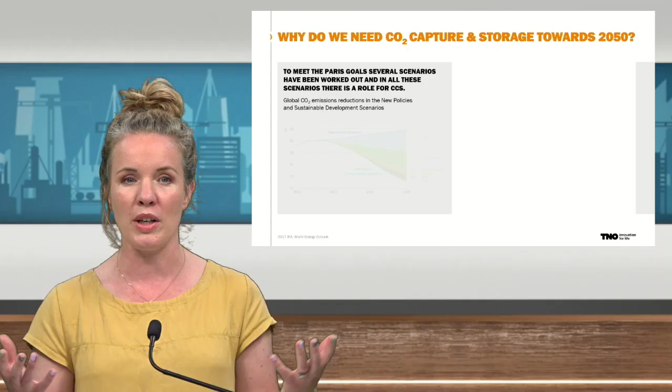So, please fill in your answers. We will come back to the results of the poll question a bit down the line. So, this is me asking you this question, but of course I want to say what we as TNO and the people here think. Why do we actually need CO2 capture and storage towards 2050?

For us, it's important to see where CO2 emissions are difficult to avoid. And we see that there's quite a lot of industries and sectors where it is actually hard to avoid CO2 emissions with other measures than CCS. So if you want to reduce the emissions there already now and in the coming decades, and not wait until technologies are so mature, we need CCS right now towards 2050.

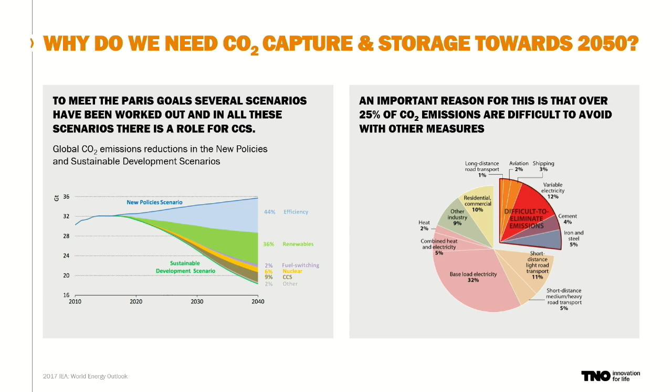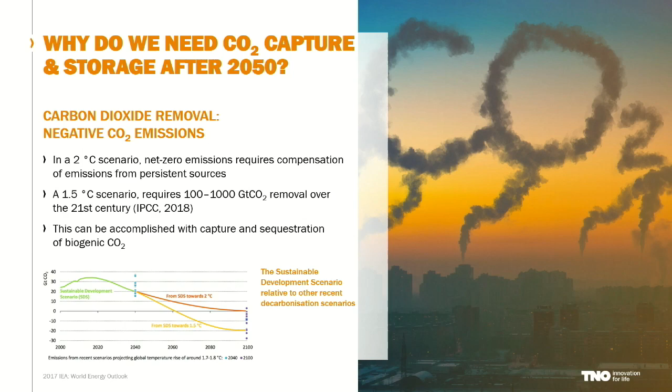But we think that even beyond 2050, CO2 capture and storage is necessary. This comes from the IPCC report, where it states that if we want to stay below 1.5 degrees of warming, we actually need negative CO2 emissions. And negative CO2 emissions you can only obtain when you do carbon capture and storage. So we actually think that it's very important.

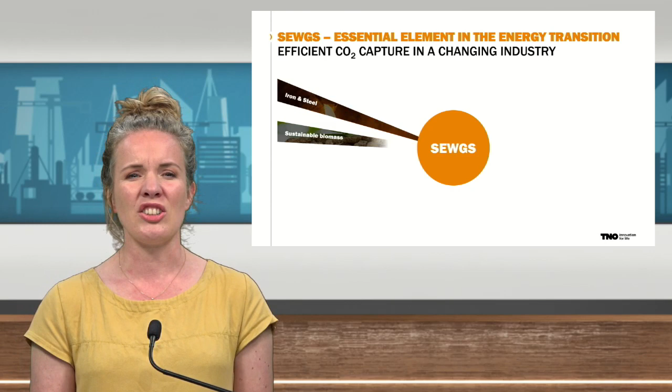And here comes in the SEWGS technology. So we think we have here a versatile and attractive CO2 capture technology, and I want to tell you a bit more about this. SEWGS is an essential element in our opinion in the energy transition, and what's nice about it is that it's really a platform technology. So today we will focus on the iron and steel industry because we're making some great steps there, but SEWGS can actually be used for many types of industry.

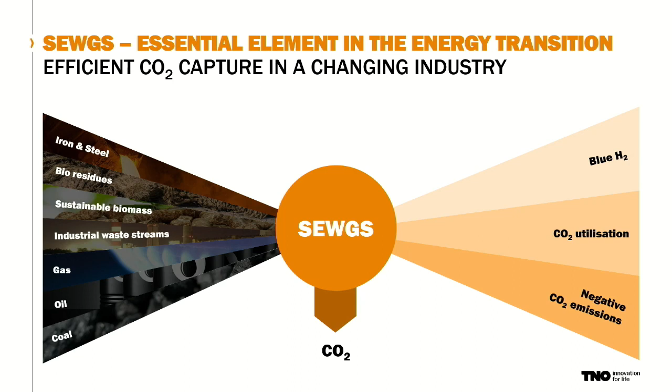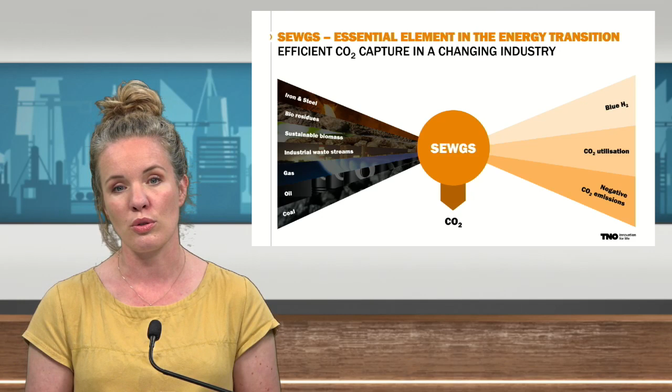Everywhere where you have syngas type mixtures, you can use SEWGS. So from the gas and oil sector, coal sector, everywhere where you have sustainable biomass sources. And with the SEWGS technology, we capture the CO2, but we also produce blue hydrogen. We can use the hydrogen and CO2 for CO2 utilization, and when you use biosources, we can go to negative CO2 emissions.

Well, how does the technology actually work? Because that's important. SEWGS stands for Sorption Enhanced Water Gas Shift. It is based on two things. First, the water gas shift reaction, where CO and steam react to CO2 and hydrogen. And secondly, it's the adsorption of CO2.

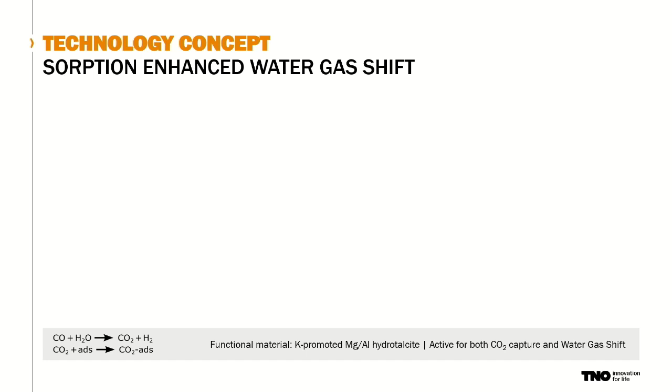Where the water gas shift reaction is an equilibrium reaction, by capturing the CO2, it is possible to completely shift the reaction to the production of hydrogen. And that works as follows. We have multiple columns, and they are in different stages of the process, which I will describe.

First, we have the adsorption stage. So we're at high pressure and high temperature, and we're coming in with a syngas mixture. It can be a mixture in different forms, but we're coming in. Here we have the water gas shift reaction, so your CO is converted into CO2 and hydrogen, and your CO2 is simultaneously adsorbed on the adsorbent that we use. This means that on the bottom of the reactor we have the hydrogen product.

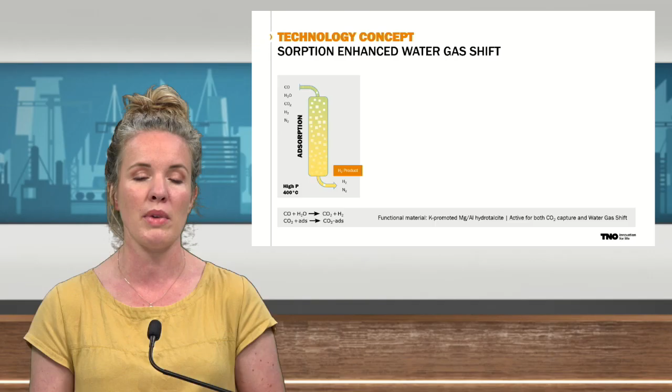At a certain point, the material we use is saturated, and we want to go to another column in adsorption mode. But the column that is saturated, we use the following steps. First, we have a rinse step where we rinse the column with steam. This is to get the optimal CO2 purity.

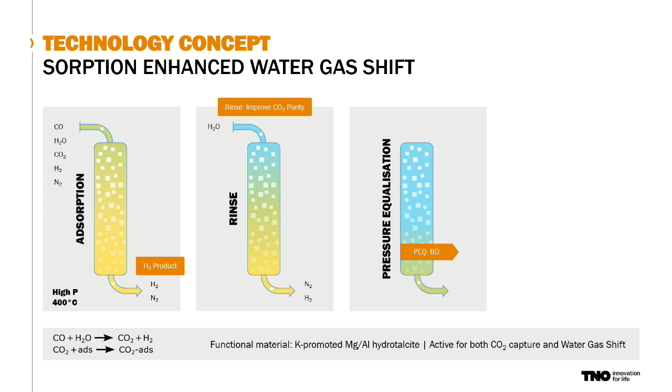Then we have a pressure equalization, which is very important for the efficiency of the technology, because by lowering the pressure, we can get another column that is at low pressure up to pressure. And this is also how the technology works. It's a pressure swing type of technology.

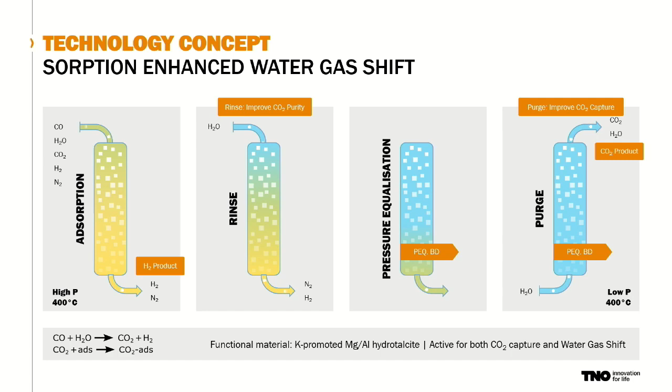While we have the adsorption at a high pressure, we do the desorption at a low pressure while we remain at high temperature. So with steam, we purge the column and the CO2 and steam will come off. And in this way, using multiple columns, we generate continuous flow of a hydrogen product and a CO2 product. So this is how the technology works in short.

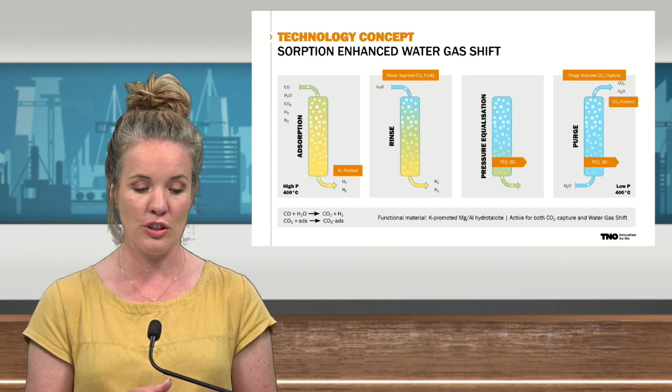Before we dive into history, I want to come back to the poll questions, which are interesting and nice to see as well. Erik, I will ask you something about that because we did not hear you yet. When we look at the results, we see that 35% of the people think that it is really a transition technology, and 65% think that it's really needed also in the future. Can you share a bit what your opinion or view is on this? Where would you classify CCS?

I think indeed you can consider CCS technology as a transition technology, but in my opinion, it will definitely be something that is needed in the future as well. If we are going to a carbon neutral society, there will always be industrial sectors that are dependent on carbon. And so if you want to eliminate those emissions, you need CO2 capture. So in that respect, I think CCS technologies are required now to limit the carbon footprint of hard-to-abate industries, but they will also be essential in the future to come.

Yeah, okay, thanks. And maybe it's good to know for the people at home, but also for Erik and Carlo, nobody said CCS is not an option, which is maybe not strange seeing that you are joining this webinar, but it's still nice to see. So then we go into, we have no questions yet at this point, but they'll come for sure. I think my explanation on how the technology worked was very well.

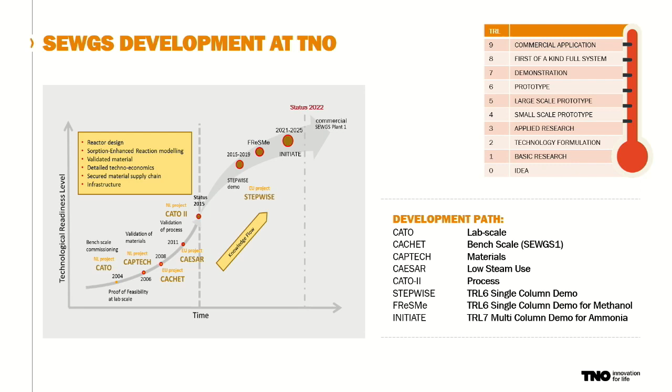But there's a point where you want to make the step to real industrial gases, and we made that step in the Stepwise project. Here we went to the first single-column TRL6 demo, where we really used steel gases. From Stepwise, we had other projects like FRESME and Initiate, which Erik will talk about later. But I want to tell you a bit about the Stepwise and the FRESME project, because they are finished projects, and we can show you a bit how the technology actually performed already in these settings.

But all these different steps within the steelmaking process generate gases. And these gases contain still a lot of energy, so CO, they're syngas type of mixtures. These gases are used internally for different processes, and all the energy content that is not used internally is often sent to a power plant to produce electricity.

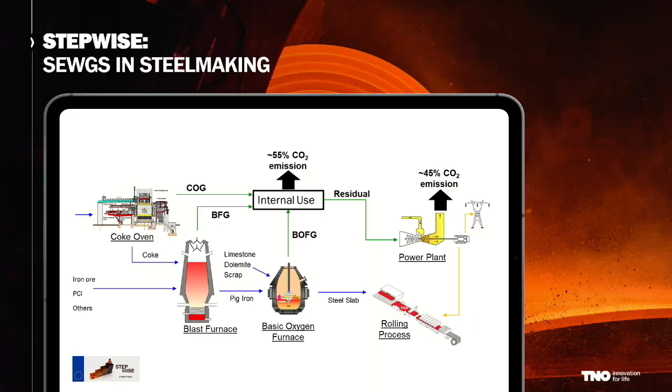What we wanted to show is that we can capture CO2 from one of these lines and produce the hydrogen. That's what we did in the Stepwise project. In the north of Sweden, in Luleå, there is the steel plant of SSAB. And next to this steel plant, there is the research facility of Swerim, the Swedish Institute for research around metals.

How did the pilot look like? To start off, we had the blast furnace gas, 800 normal cubic meters per hour, used in the plant. It first goes through a pre-water gas shift section and then to the SEWGS section, which was the column I just showed.

To show you, if the SEWGS system would have been multiple columns, we would have been able to capture 14 tons of CO2 per day, if we could make it continuous.

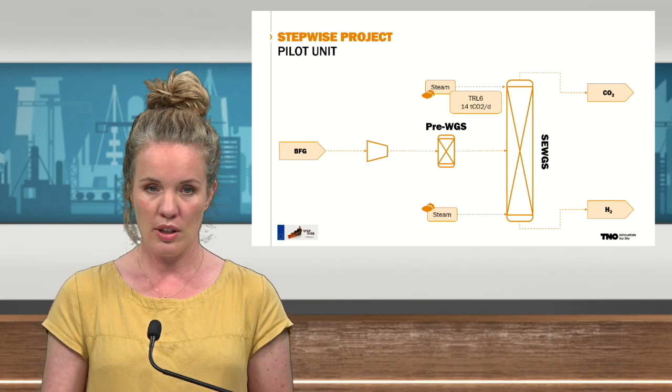So what did we achieve in the Stepwise project? Over 5,000 cycles, we have shown that we can reach a CO2 purity up to 95% and a carbon capture rate up to 100%. We also proved that we can achieve a cost reduction compared to the state of the art of 28%. This was really a milestone to demonstrate not only that we were able to capture the CO2, but that it really works in a very nice way, and that we are competitive to the market.

So then we had a follow-up project, the Fresme project, where we used the same installation, but where we wanted to demonstrate that the hydrogen and the CO2 that we produced was of such a quality that if you would want to go for the utilization option, this would be possible.

In the Fresme project, we went from utilization to methanol. The idea behind it was to use the methanol for the shipping industry. We used it for the ferry boat of Stena Line that sails between Germany and Sweden.

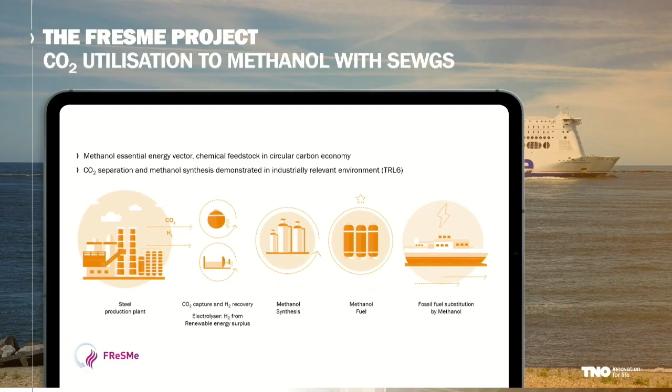So here you can see in a graphic picture the idea. Your steel gases, you convert them to CO2 and hydrogen, and convert this to methanol, and use it for the shipping. So what did we achieve?

We treated 570,000 normal cubic meters of blast furnace gas, and were able to produce 25,000 liters of methanol over a total operation time of 15,000 hours. This really demonstrated that the quality of the capture is in such a form that we can actually use it for utilization.

And talking about utilization, this is also where I have another poll question for you listening at home. Looking at capture, utilization and storage, there are multiple options, and I would like to know how you consider this. Do you think carbon capture and carbon utilization go hand in hand in the energy transition? Or are you of the opinion that carbon capture and storage is only an enabler for carbon capture and utilization? Or do you think there's so much CO2 in the industry that it's really not worthwhile to consider CCU?

We will come back to this again in a short bit. In the meanwhile, I have some questions.

And so that I'm not the only one speaking, Erik, who was the project leader for the other two projects as well, will help answer. So Erik, you will know these questions too. I have a very nice question here: do you need to put in extra energy in the process, or is the high temperature just a requirement of the process?

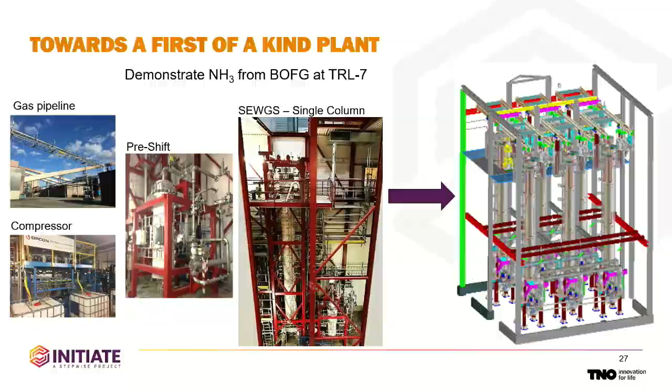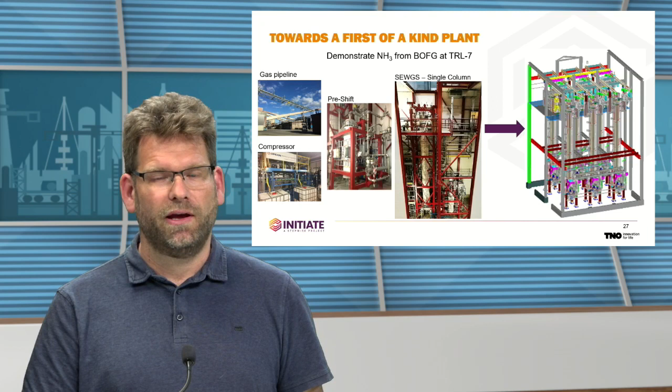So what Soledad explained for the history, in the Stepwise and FReSMe project, we went to TRL6, and this project will bring the technology to TRL7, meaning that we will build a multi-column system receiving the real gases from the steel industry. Well, a multi-column system is because of indeed this pressure swing adsorption operation. So a multi-column system would allow you to continuously produce a CO2 stream and a hydrogen containing stream.

So somewhat more detail about the vision and the concept of the Initiate project. So we are linking the iron and steel to the ammonia and urea sector, and thus demonstrating the reuse of the carbon within the BOF gas towards urea.

This demonstration project heavily relies on the demonstration of the technology, so demonstrate the operational reliability to be ready for the commercialization. And we do that by demonstrating the continuous production of ammonia from BOF gas. With that, we aim to demonstrate that this gives you a positive business case at an internal rate of return of 15%. And of course, you need a strong consortium for this, which is depicted below, and I'll talk about this somewhat later.

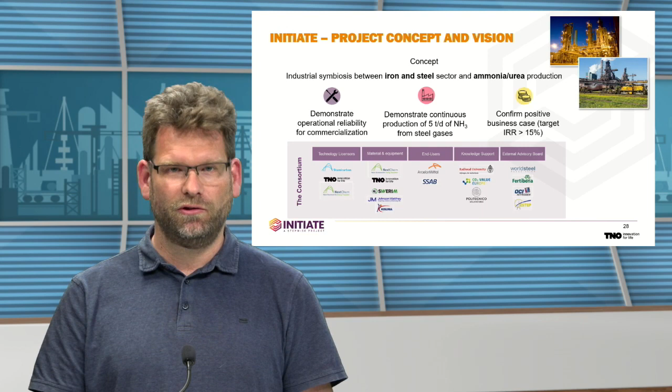So let's go a little bit deeper into the concept. What you see here in this slide is a block flow diagram, very simplified, of the two industries we're looking at. On the left-hand side, you see the iron and steel industry taking in iron ore and coal, and eventually producing steel products.

That's their core business. During these processes, valuable off-gases are produced containing caloric value. So they are used internally to some extent, and the surplus of these gases is normally sent to a power plant, where you have the major part of the CO2 emissions, well, 50% actually.

On the right-hand side is a block flow diagram of an ammonia and urea plant. So normally taking in natural gas, doing the reforming step, cleaning the syngas up to a hydrogen-nitrogen mixture, doing the ammonia production, recombining it with part of the CO2, and then you come to your urea product. There's also CO2 emissions involved in this process.

So both of them indeed have a certain carbon footprint. Typically 2 tons of CO2 per ton of hot rolled coil for the steel industry, and typically 1.8 ton of CO2 per ton of ammonia product. So both industries naturally are exploring ways to decrease their carbon footprint.

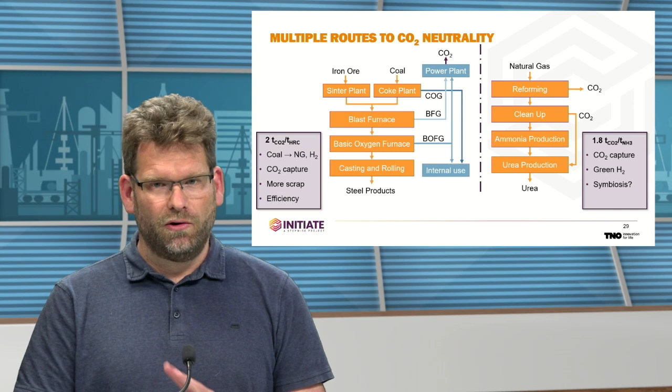In the Initiate project, we are looking at the symbiosis options between these two industries, and that looks in a simplified scheme like this. So we plan to use the BOF gases from the steel industry as a feedstock for the ammonia and urea production. And why BOF gas, you might ask?

Well, it has a very favorable hydrogen and nitrogen content. So if you do the complete conversion and the CO2 removal, the ratio of hydrogen and nitrogen is very suitable for the ammonia production. That's why we use this gas.

So this is the concept we want to demonstrate, and there's two enabling technologies on this sheet. One of it is the SEWGS technology, sorption-enhanced water-gas shift, that we're talking about today. And the other one is the ammonia production, where we will demonstrate a novel concept focusing on substoichiometric feeds of hydrogen and nitrogen.

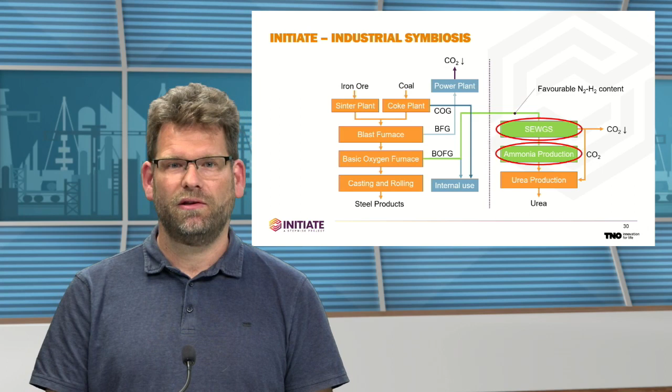Well, the Initiate project is born out of our development in the Stepwise and the FReSMe projects. But prior to the Initiate project, we did a pre-feasibility study where we looked at the technical, economical, and environmental aspects and benefits that this route could have. And there we identified that there's definitely technical feasibility by means of these two enabling technologies: sorption-enhanced water-gas shift and the substoichiometric ammonia loop.

The study towards the economical feasibility showed that there's a positive business case if you go for urea derivative products. So that actually means that combining these two industries via this route actually pays for the capture of the CO2. And very importantly, for the economic feasibility, early on we have already identified that there are locations within Europe where BOF gas is available close to an ammonia and urea plant, which is of course essential for the rollout.

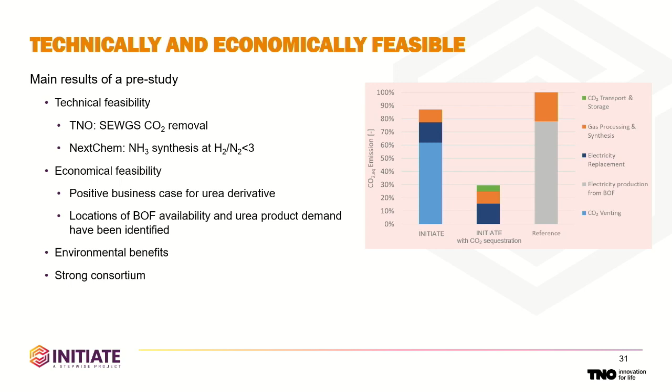Another very important result from this feasibility study is that we were able to build a strong consortium for the next, follow-up project, which is Initiate, and that has started now. In Initiate, we will demonstrate, validate, and do all the preparations for the first-of-a-kind plant.

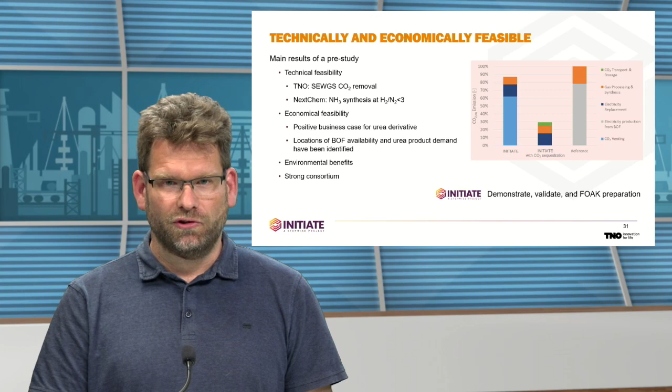So we have a 5-year project, started in November 2020, with a subsidy from the Commission of 21.3 million euros. Initiate will result eventually in the evidence for the rollout.

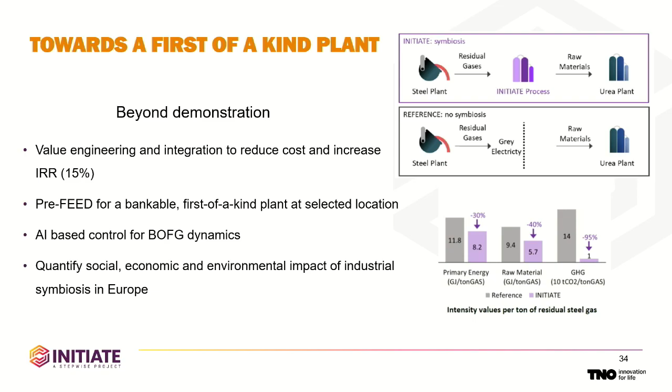Beyond the demonstration, via value engineering and integration, we will show that we can reduce the cost and reach a certain IRR. The project will also show the bankability of the pre-FEED, and make all the steps for the first-of-a-kind plant as the next step at a selected site.

Because of the dynamics of BOF gas, and to ensure the most stable operation of the ammonia plant as possible, you need quite advanced control, so we also developed that within the project. Next to these technological goals, we will also look at quantifying the social, economic, and environmental impact of this industrial symbiosis route within the European context.

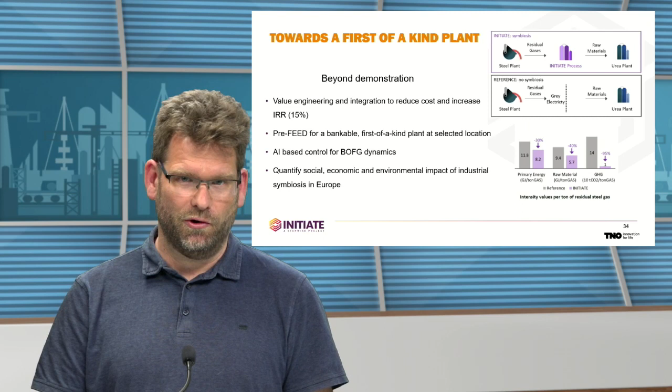So where are we now? As said, we started in 2020, so we're now in month 18 of the project. A very important aspect in the beginning of the project was the engineering and procurement of the pilot that we are going to build to demonstrate the concept.

The layout and the functional materials have been fixed, and the control architecture characteristics have also been fixed, and this is now in further development. This depends, of course, on the dynamics of the feed, but also the contaminants that you can expect in these kinds of feeds.

In the project, there's a very strong contribution of multi-scale modeling, because, for example, for the control we are developing dynamic models for all the unit operations in the plant. For the validation of the technology, we need the techno-economic evaluations and the life cycle assessment, as well as the symbiotic analysis. For these analyses, the basis has been made.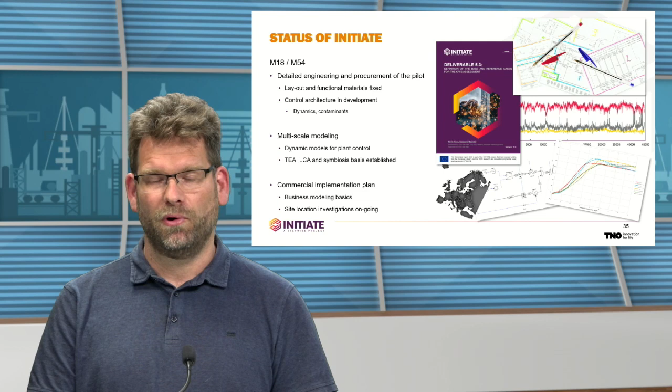For the commercial implementation plan, the basis for the business modeling has been defined, and we are progressing with the site identification. So, Initiate in a nutshell: we will demonstrate the reliability of this route by the continuous production of ammonia.

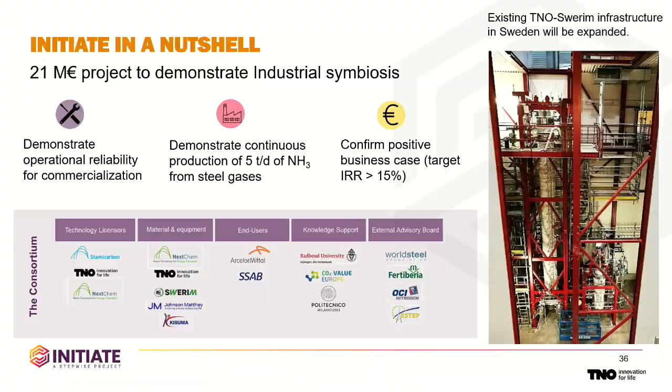And also confirming the business case at the end of this project with, again, this consortium. I should mention we're also backed up by our esteemed members of the External Advisory Board: World Steel, Fertiberia, OCI Nitrogen, and ESTEP. That more or less summarizes the current status of the project.

Thanks. So this was, until now, we have covered history, present, and before we go to the future, we have some time to go to the poll questions, but also to have some questions from the audience. But first the poll questions, and maybe ask Carlo already for some feedback.

Carlo, we just asked the audience how they look at carbon capture versus carbon capture storage versus utilization. 37% of the audience thinks that CCS and CCU go hand in hand in the energy transition, so that we need them both. Is that an outcome you would have expected?

Yes, it is. I think CCU and CCS shall go hand in hand to better contribute to the energy transition, as we can combine the benefits from the utilization of a suitable part of the carbon captured, along with the transportation and storage of the remaining. Yes, I deem they shall go hand in hand. I would have voted exactly the same as the majority of the audience.

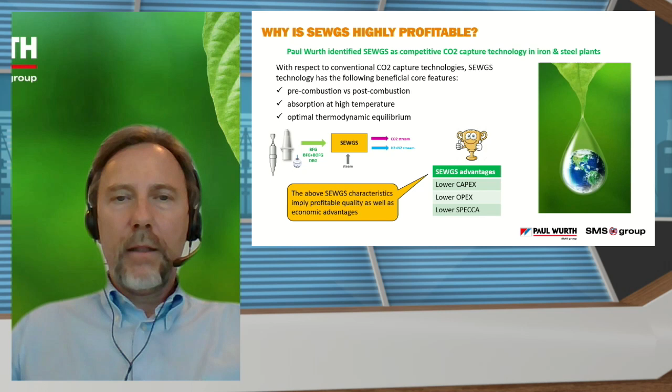Based on this consideration and our market expectation and vision of carbon capture deployment within iron and steel plants, Paul Wurth and TNO signed a cooperation agreement to further scale up the technology level of the SEWGS core technology, to design and deploy SEWGS-based CO2 capture plants within the iron and steel industry, both for the blast furnace and basic oxygen furnace route and the direct reduction route.

This shall enable, as I mentioned, a transition period of probably some decades of operation with existing plants, but with a very significant impact on CO2 reduction, thanks to the adoption of SEWGS-based CO2 capture plants.

We need a further step to reach TRL 8 based on the industrial scale demonstration of the core technology. So a key point of our cooperation with TNO is the design, construction, and test campaign of an industrial scale SEWGS demonstration plant integrated within a steelworks in operation.

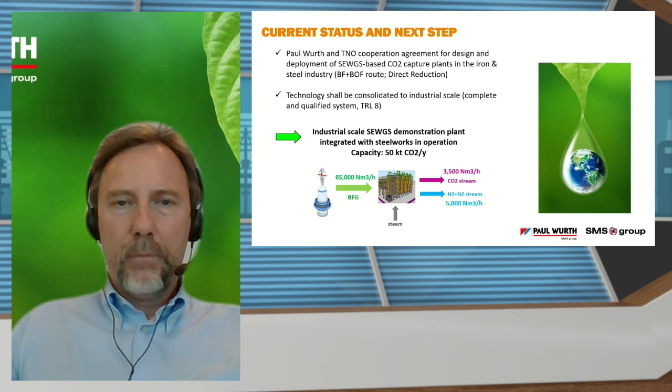The next slide, please.

Based on this ambitious target, the future perspectives we expect are an important contribution to the decarbonization of the iron and steel industry, thanks to the integration of SEWGS-based CO2 capture technology within existing iron and steel plants.

We consider that the full CCU and CCS chains shall be applied and managed in order to combine the benefits from possible utilization on site of the captured CO2, according to reasonable amounts, and transportation and sequestration for the remaining part of the captured CO2.

Taking into account that in such plants, in such an industrial sector, the potential amount of captured CO2 is considerably high, we might talk about millions of tons per year. So a future full-scale integration of this technology with iron and steel plants will be applied, with a future target of green steel production in Europe and worldwide.

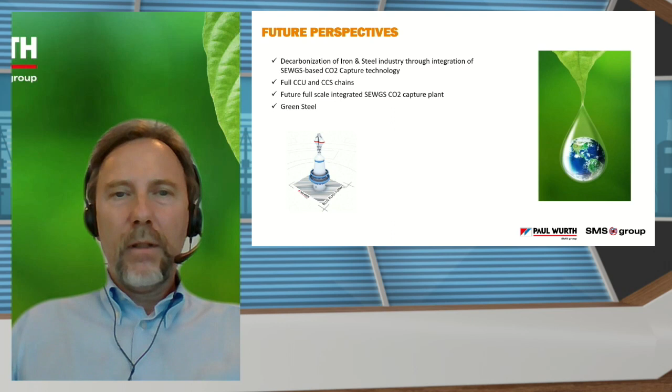That's all, and thank you so much for your attention.